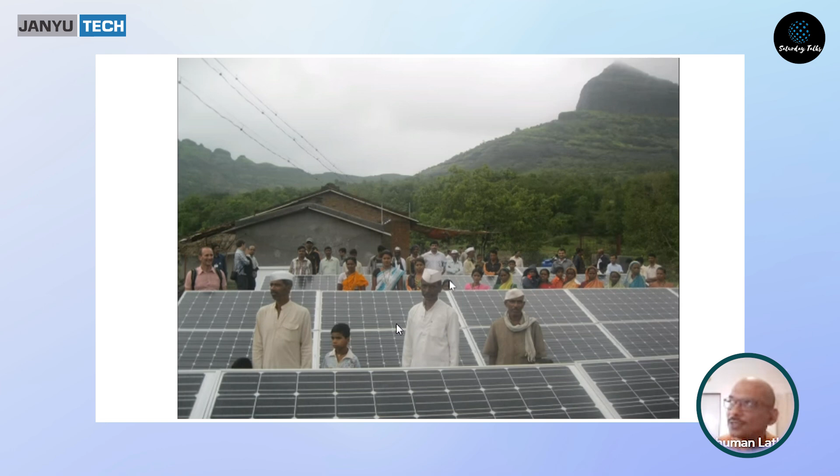Okay, so this is a village called Darewadi. From Pune, where most of us are, this is around 4 hours north. If you go north towards Nasik, there's a place called Narayangaon, and from Narayangaon you go left towards Junnar, where the Shivneri fort is, and from Junnar you go ahead another 35-37 kilometers, so another hour and a half towards Naneghat. So this is the village called Darewadi, and this village we electrified in 2012.

So you will find some people here. This is George Hanna from Bosch Solar Energy AG of Germany. Two or three things are very clear in this small picture. This is one of our first pictures of a large project, and this is a village which is very remote - even today you have to walk down a hill 2.5-3 kilometers to get to this village. Secondly, the solar panels you see here are slightly big - you can't say this will give you 2 LED bulbs for 2 hours. So what we are seeing here is a project designed as per the needs of the people, slightly bigger than what we would normally see in such a small village of 39 households. This is the Mahadev Koli tribe, 39 households, in a very remote area.

The third aspect that this picture brings out, which I always like to highlight, is that it looks like a lot of people are involved - a lot of these people in the village are involved in this whole project. So I'll just go through some more pictures like this.

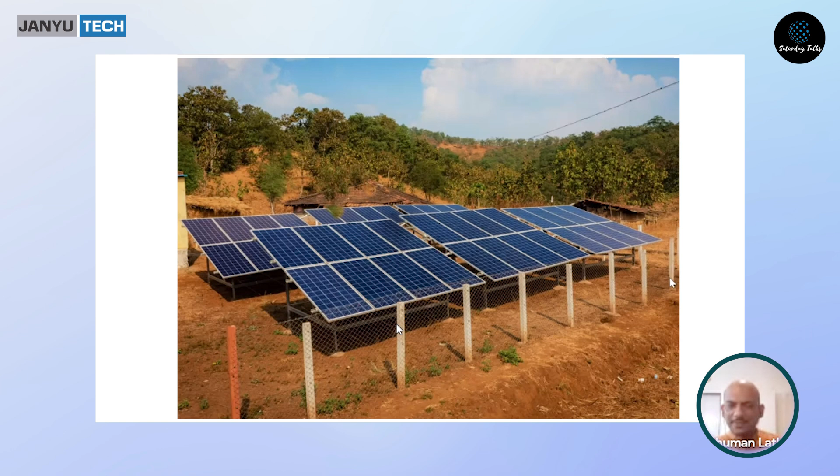So this is the first such microgrid, as we call it, and the microgrid concept is very simple: one plant for the entire village, then a grid which goes across the village like the Sarkari grid, and a metered connection to each household. There is enough scope in the village to run a pump or a chakki, and then each household - some 25% of them will get television, some will get a mixer, some 1 or 2 will get a refrigerator.

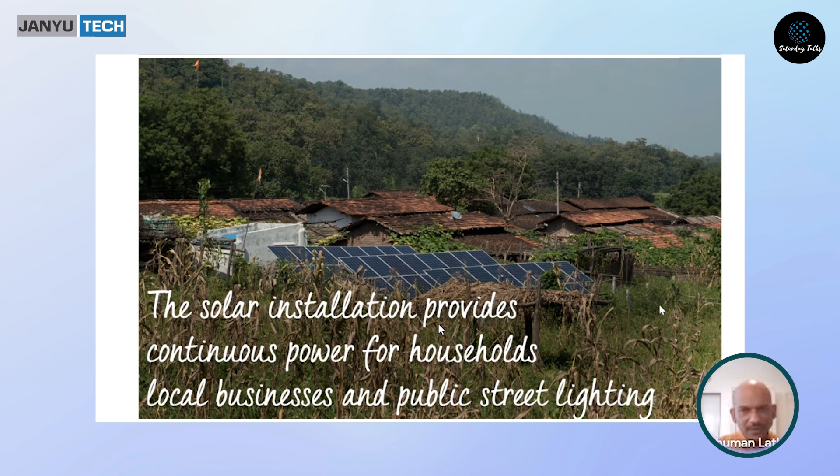This is in the Melghat forest, Amravati district, the buffer zone of the Melghat Tiger Reserve. This village did not have the grid, so we set up this microgrid. This is the solar plant, and these are the connections in the village.

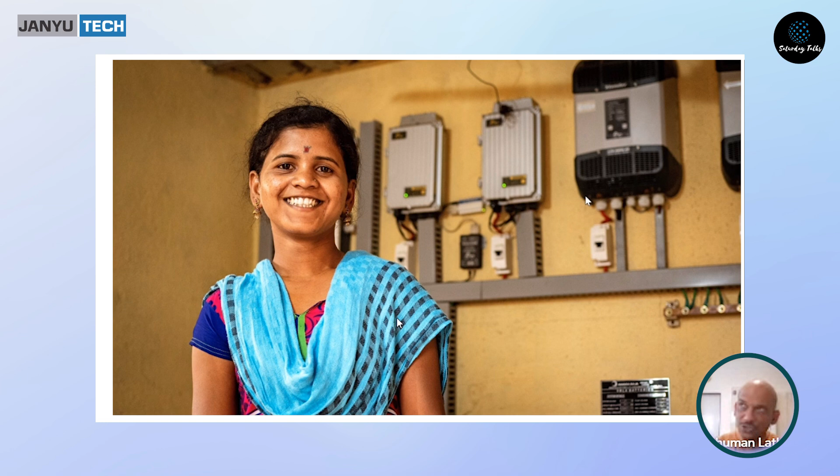Just like she's the operator in her village, he's the operator in his village. Every month he goes across each house, takes down the meter reading, and they collect the money and put it into the bank. This is how every month they create a list of all the people who've paid.

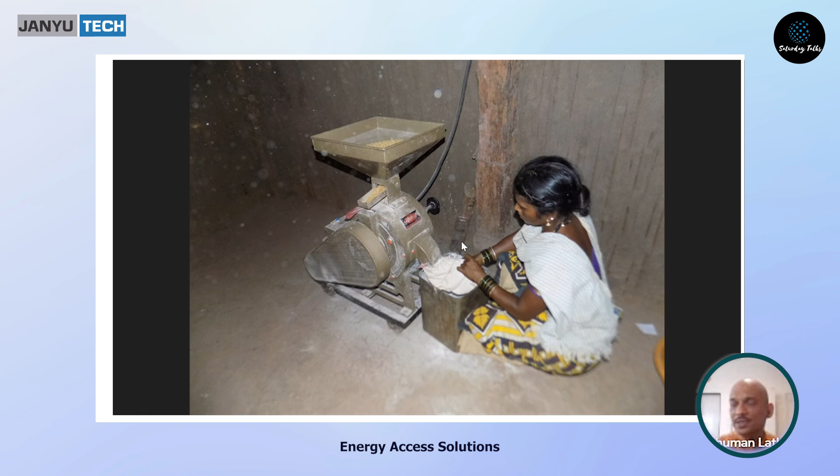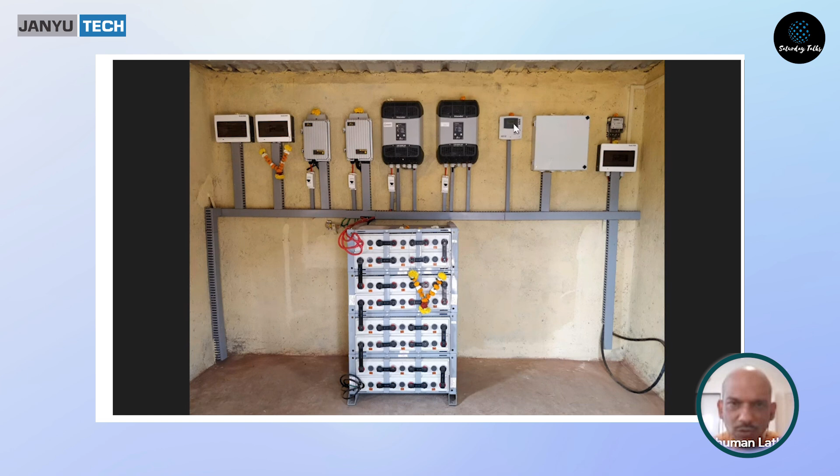This is the inside of a control room. You will see Studer inverters and charge controllers, and batteries mostly from Exide or Amara Raja, Amaron batteries. Typically 20-30% immediately get the TVs.

The story around all of this was that there's involvement of people, they participate in the decision making, and what we're able to deliver is slightly larger than just small mini grids that would be good enough only for lighting.

In 2008, when I was traveling with my colleagues across villages, even in Dandeli Forest, the Anshi Tiger Reserve area and other places, we would ask, do you need electricity? They'd say, we don't need small electricity, we need big electricity. Why? Because they'd say, we need a pump, or we want to watch TV.

No one is just satisfied with basics, people are aspirational. People would not be happy with just 2 lights.

In our first project, we actually fought with Bosch because they said, this is a small village, why do you want something like this? We said, no, unless we can provide them something they can run on a daily basis, like a chakki, pump and others, this is not going to feel like real electricity to them.

One experience I'd like to highlight is that when we were setting up the first project, the villagers were kind of lukewarm because they'd never seen something like a microgrid before.

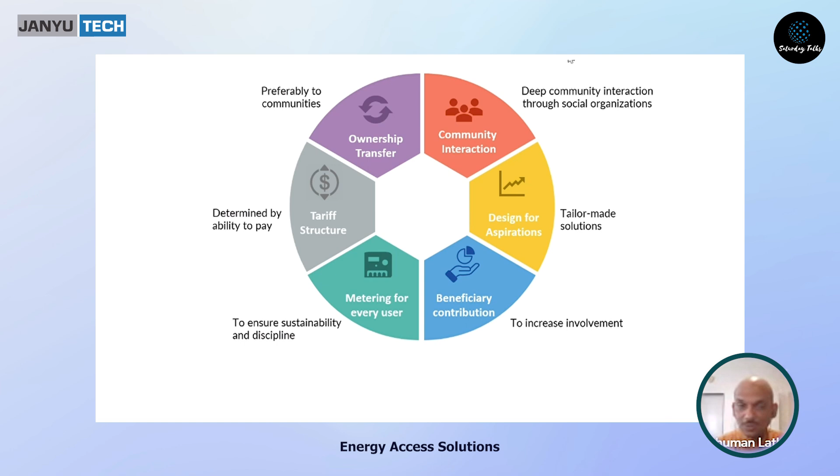So this is the story that we have been trying to build up, and this picture is the best way to showcase that.

Where are our projects? If you look at our map or our website any day, you'll see that they're around this belt, the central belt of India. Why is this? Because this is the underserved part of India. It is forested, it has hills, and it's difficult to bring the same kind of infrastructure that we get in the plains to most of these places.

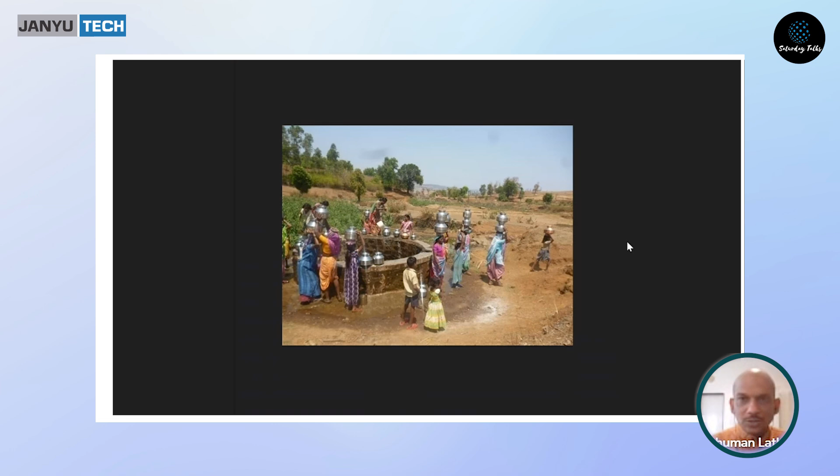As we moved ahead, we found that a lot of villages already had the grid. So what is the problem there? The problem is water. People stay on top of a hill and the water source is down below, a well or a stream or something. So they ask, how do we get the water?

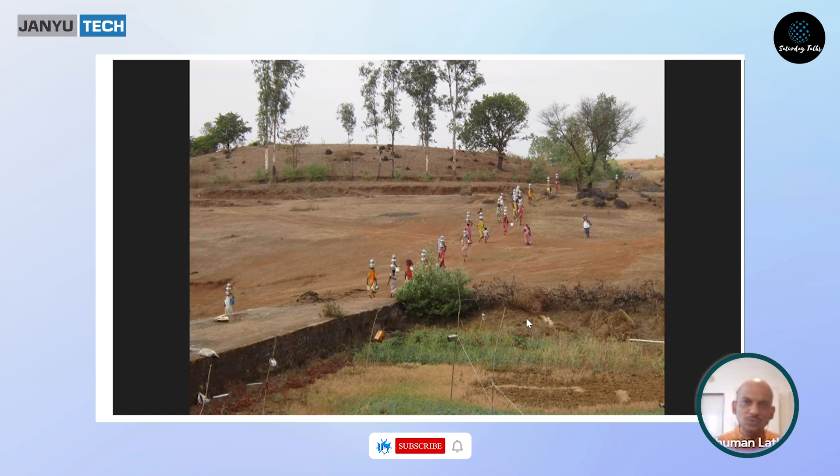The only way is for them to carry it, and each vessel is 15-20 kilos with the water. Young girls start very young, so this girl is already carrying 10-12 kilos. This was the next big intervention we thought we could do. This is a village in Jawhar. The trek can be longer when some carry 2 or 3 vessels, because then they can't come back for more. So in a day this is the only time they can fetch water, maybe a 1 hour one-way trek, that's the kind of time they have.

What we realized in our impact assessment surveys is that the usage of water also increased once the solar pumps were set up. Why? Because earlier it was only used for drinking water, cooking, and a little for the young and the old. But once more water was available close to home, they used it for cleaning, and the children could bathe there, so that extra fraction of water available was very meaningful.

So again, you can see the terrain, the people having to really go up and down. In this case, because it's not an even surface, not flat land, the number of vessels is low, so they'll probably do multiple treks to get the water up to their home.

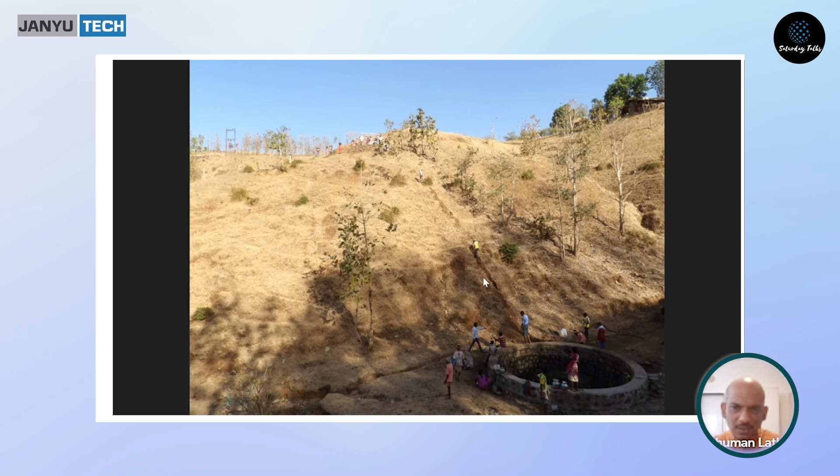So in such villages, we've started setting up solar water plants along with the villagers who really would help, and then we would set up something like this up in the village, the Tanki. And then this is what is called a stand post.

So a stand post in such villages, maybe 5, 7, 10, depending. So within 100 meters of your house, most of the people could get some water. And there would also be a Nal Pani Yojana Samiti.

So the villagers would have a time when they will start it, will stop it, close the water, close the valve. And then every villager would also pay 30 to 50 rupees per month, every household, for the maintenance of the plant. For example, there are cases where they've had to change the panels because someone has stolen or broken it, or some small cases here and there.

So when you say that this will cost you so much, they don't have to go back and look for the money. They already have it in their common account. So this is from the learning from the villagers.

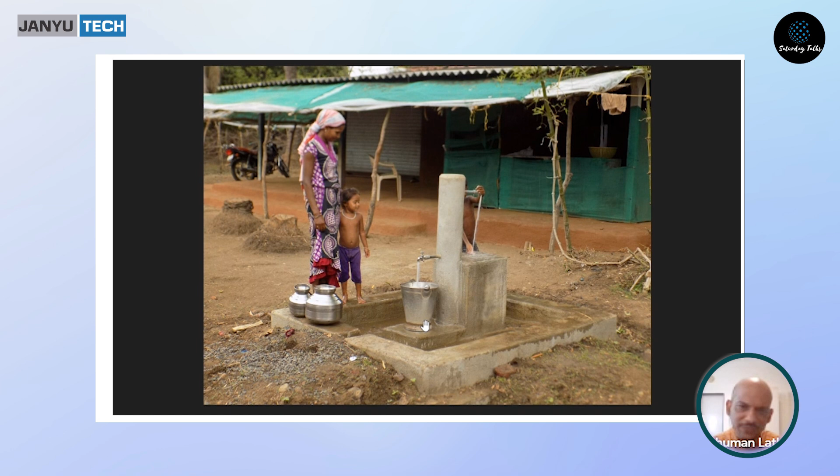So they said for the baltis or the buckets, we need it down below. For the vessels like this, like the handis, we need it up here, so it's easier to pick up. So then the stand we started creating like this. Very, very interesting inputs coming from there.

Similarly, other places like this. So again, you can see what kind of areas are we talking about. This is like one village that we have, a village called Brahmanpada in the Mokhada area, not very far from Nasik actually, 1.5 hours drive.

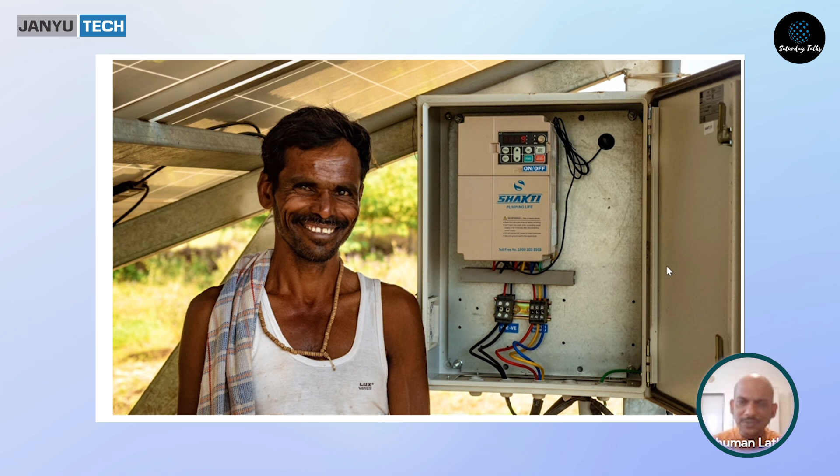Again, there's an operator. This operator knows how to handle 90% of the cases if there's a problem. And then above that, they would call us. And if there's still a problem, then we'll get to the supplier. So the suppliers know us well because we've now installed maybe 600 such villages with pumps and stuff. So we know how to get service out of them, and it's easier than an individual.

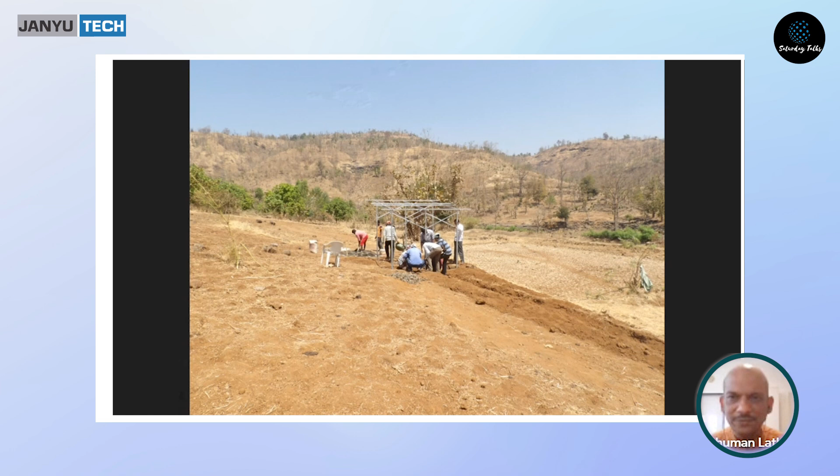Just to come back, when we started off, we didn't know what we were going to do. The name had come, Gram Oorja. We wanted to do something in rural areas for solar. But we were trying biogas at home, we were trying home lighting, and we realized that that's never going to be a business. It always needed some different kind of business idea.

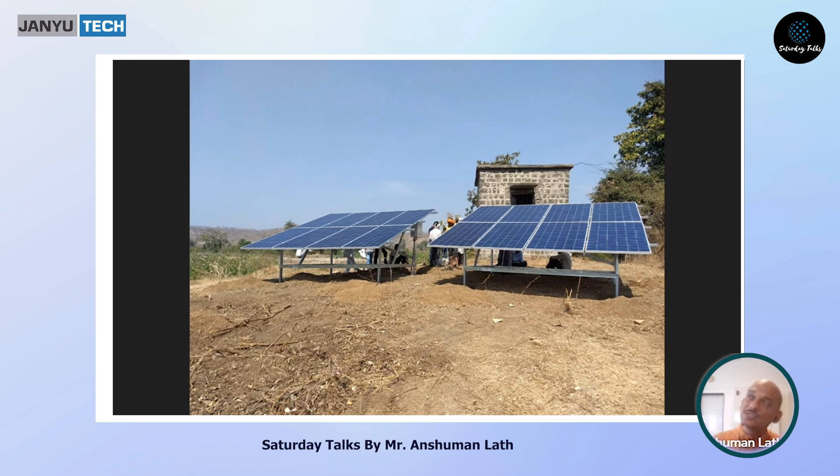So this Darewadi, that's so important in our journey, because in 2012 we did that with Bosch Solar Energy. And why did Bosch come to us? They had set up a large solar module plant in Germany, and they said that 30,000 villages in India are still off the grid. This was like 2011-12. So they said, why don't we come and do something there? So that's their idea, and they said, okay, let's do one pilot.

So they were looking for partners, and we did one for them. And in fact, we did one more for them because one of the other partners failed to deliver. These are not so easy places - I've not shown you some pictures, but the way we've carried poles to some villages up the hill, the way we've carried batteries, is very, very difficult. And only because the villagers are keenly involved can you do this.

So similarly, a picture which shows, again, village life, and then all of a sudden there's a pump with solar, providing the electricity for this.

So this was the second intervention, which we have now done across 175 odd villages across Jharkhand, Maharashtra, and other parts. Then this is the other breakthrough. Just like Darewadi was the first breakthrough, then the pumping thing which happened, and now the third one.

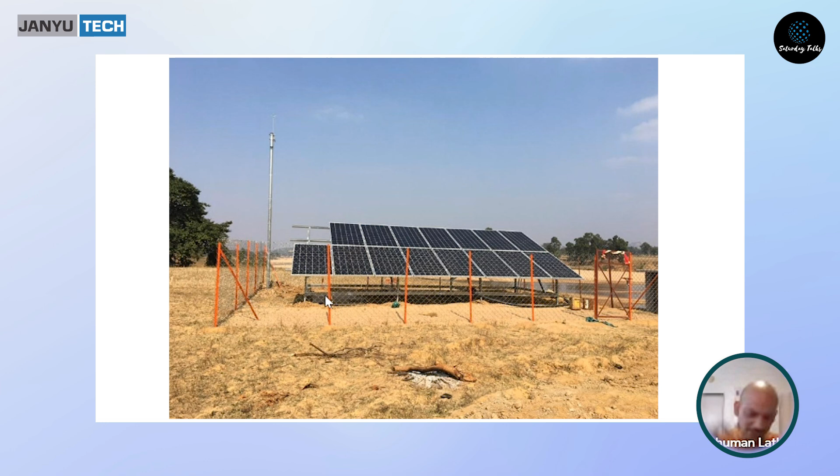So one village called Tulya Chapada, which is again not very far from Nasik. From Trimbakeshwar, it would be around 1 hour. We went there, and those people were going out for sand mining. Sand mining means they would actually go to the seaside with contractors, and they would go down to get sand. This would be very, very taxing on their lungs, and almost all the menfolk would, like at 40, 45, start getting terminally ill.

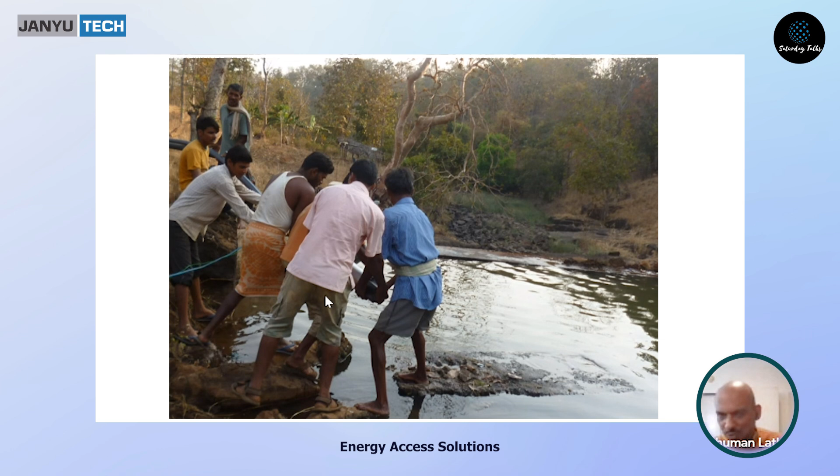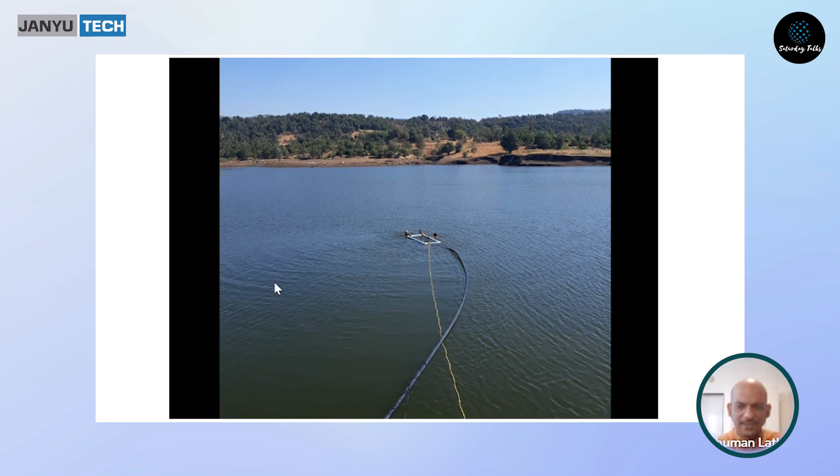So this new intervention, which is solar for irrigation, we started doing for villages which have surface water. So like small check dams in this forested area, or a small big farm pond somewhere. And again, you can see that this is forest area, a difficult forested area. And we started doing this solar for irrigation.

And in the last year, it's really grown. So this is like what we set up. You have the solar plant here and the filter, and because this goes for drip in some cases, then the pipeline which goes into the village, and then this is the second or third crop that they are taking.

This is in Talasari. So just from Mumbai, if you're going to Ahmedabad, in Talasari you move left, and then you'll have the Pinjal Nadi going there. So we use solar pumps, and this guy did a bumper harvest of more than 1 lakh rupees on his acre. That year the chili prices were high.

So this is one village, for example, where we were doing some measurements, and you can see here that this is dry. On the other side of this check dam and the small river, you'll find that this is all land which is not utilized during the off season.

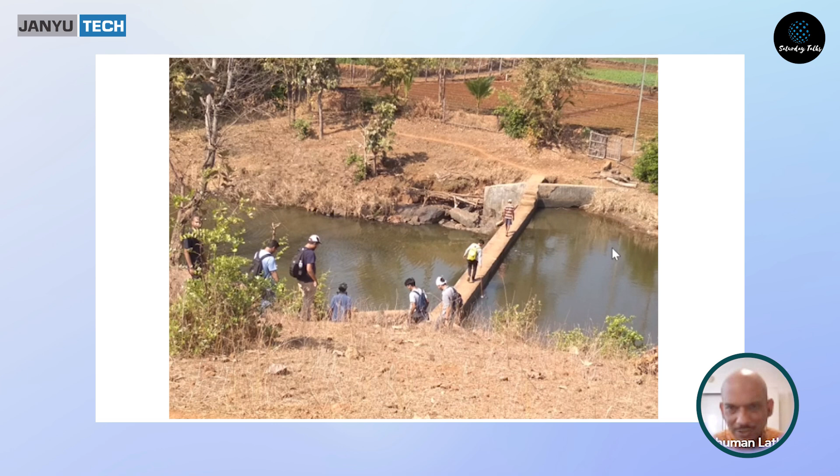And the next year, when students from IIT had actually gone for a project there to study, you'll see that this is the same dry period, but here this village is already doing a second or third crop because of the solar pump. So these are two pictures of the same spot, in two different years.

And we've been able to do this for now. In fact, the Tata Trust has something along with IKEA Foundation and others called the Lakhpati Kisan Yojana. So this year we did more than 380 odd pumps for them in Chandrapur, Gadchiroli, Nandurbar, Dhule, and some parts of Nasik district. So they've actually targeted some of the most backward regions of the country, and they're trying to allow farmers to do a second or third crop, and they form small groups along with local social organizations.

So we have been implementing this, and this year we did a very large project, more than 8-9 crores just with Tata Trust and these projects. So this has grown a lot.

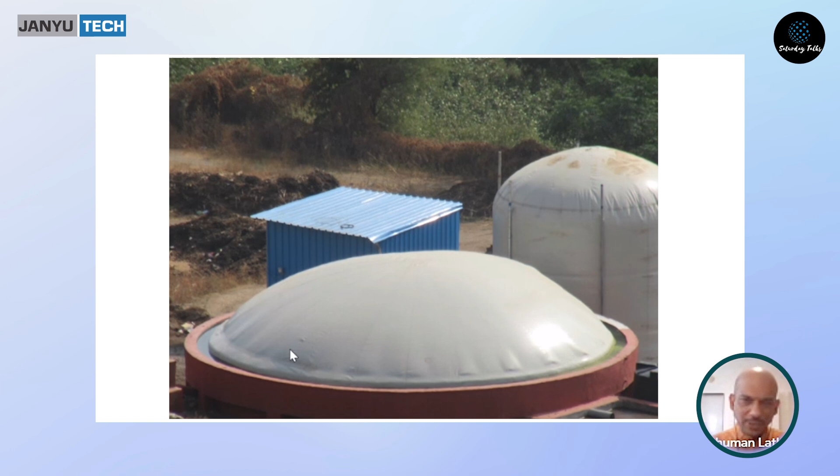So the solution we have is community based, for this whole village in Gauliwada, not very far from Pune. Just cross Pirangut, Ambadwet Taluka, we set up this plant at Ambadwet Gram Panchayat. This is a solar biogas plant with a storage balloon for the gas, and this one is near Ujjain, a village called Chipiya, which we set up.

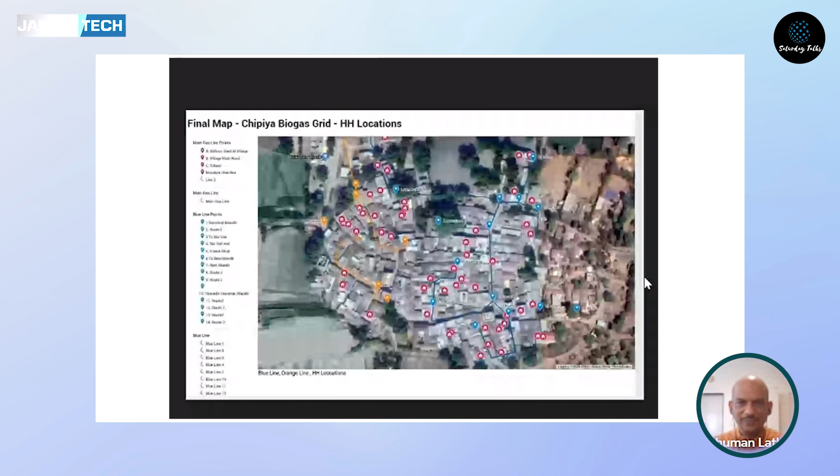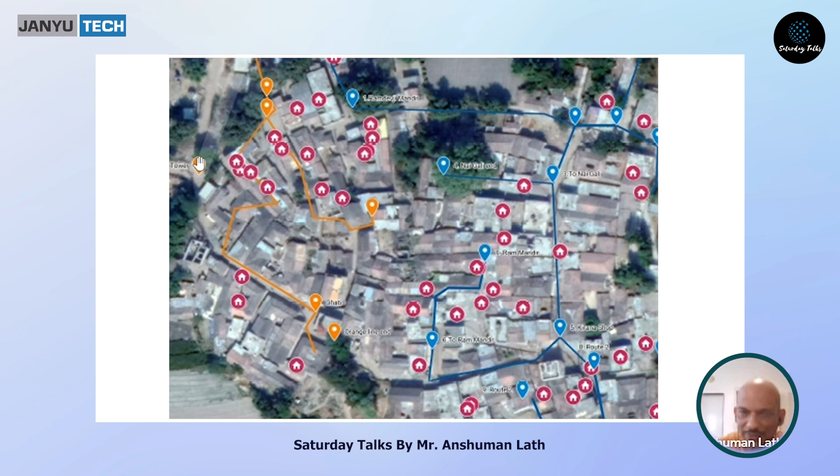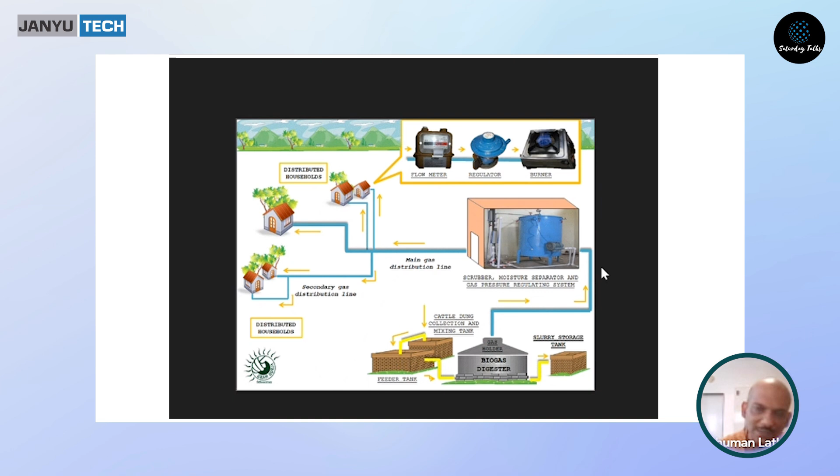You can see the blue and orange lines - we mapped 65 households, each one on Google Maps, and this is the line which goes and serves them gas. We've set up a metered connection, with a meter and regulator in each household from the digester, just like the solar microgrid, but this time it's gas instead of electricity going into each household. This is how the pipeline was laid.

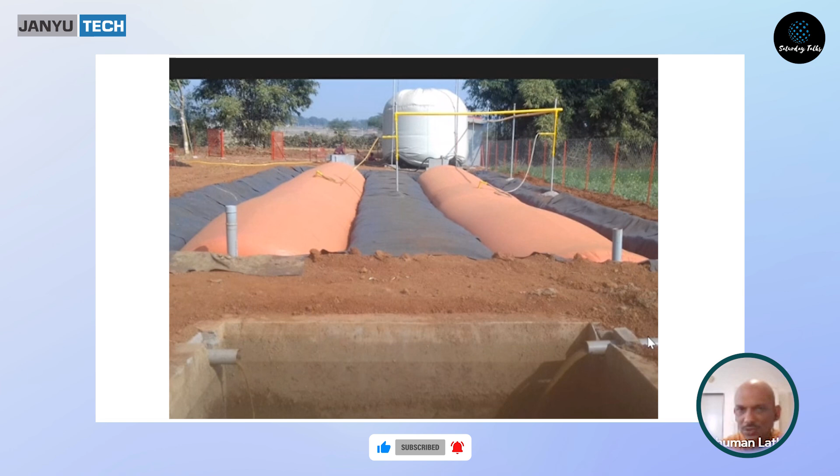This is a village called Harai, not very far from Ranchi, some 30 odd kilometers away, with 48 households and again 2.5 kilometers of total pipeline. This is a place in Thane district, Mira Bhayandar area, where there's a school down below and a kitchen like this. So 3 of such stoves are running 900 meters from this biogas plant.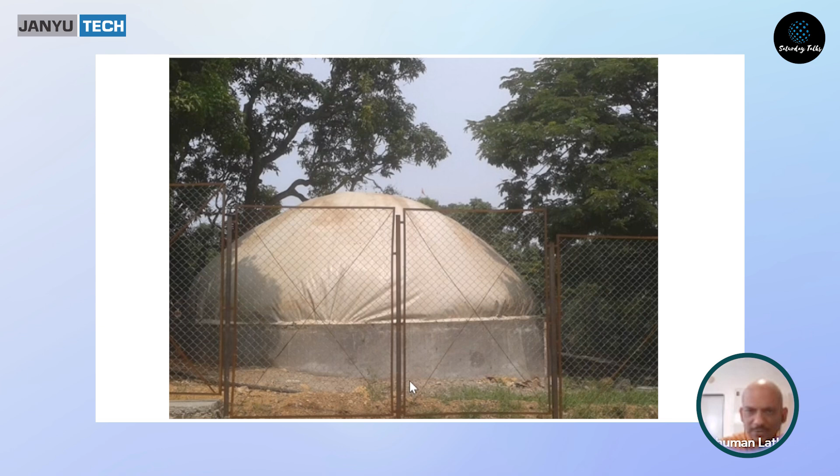Similarly, this is Pune Pinjarapol. So for the quarters, we have set up this for them - 16 quarters, and the gas goes into the household like this.

So this is our current big project where we're also trying to attract carbon credits and see how these things go.

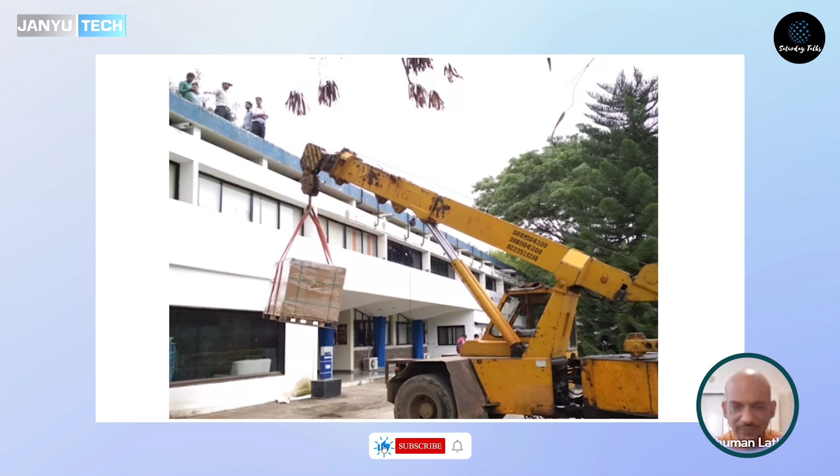Then, some 10-15% of our work nowadays comes from city-based projects. Like there's a 55 kilowatt peak plant we set up on the rooftop of National Chemical Laboratories NCL Innovation Park, called the Venture Center on Pashan - most of us have passed that every day, many times. And this is a 500 kilowatt peak plant we set up in Osmanabad district for a village project.

As you showed in the photograph, you have some operators operating and taking care of the system, and it is a metered connection. So is it just like what we pay here, a unit charge, that you collect from the villages? How is it?

So it is normally 10 rupees a unit. People use 7, 8, 9 units a month, not more, because these are small houses. They know that it's expensive, so the bill stays within 150-200 rupees in most of the places.

One example is that in Darewadi, we set it up in 2012, and on 6th June 2013, I had taken 5-6 people to show the village. When we reached there, we generally asked to see the bill of 1-2 houses. One of the bills was 650 rupees or 638 or something like that, and this was on 6th of June.